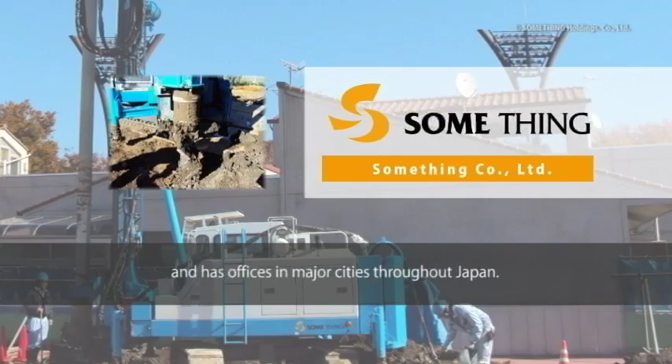Something Co. Ltd. is positioned as the core company of this group and has offices in major cities throughout Japan. The business of Something Co. Ltd. is principally ground improvement work that focuses on residential buildings and small stores. We carry out ground surveys and measurements, ground improvements, and also subsidence correction work in houses where irregular subsidence has occurred.

GIR Co. Ltd. has partnered with a damage insurance company and primarily conducts ground guarantee operations for residential housing. The firm offers SmileGuard, a safety escrow system for house completion, which provides support to the land, a ground guarantee system, and to the completion of the housing.

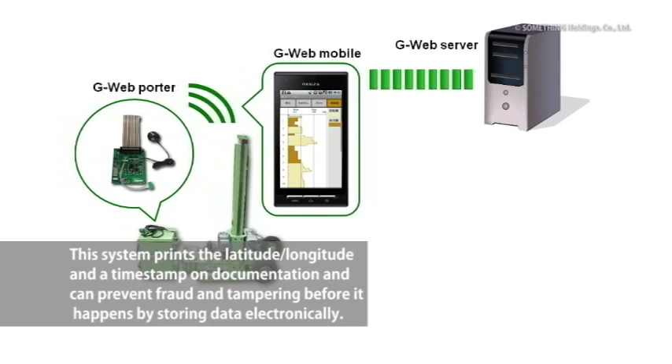GeoSign Co. Ltd. offers the G-Web system, which is a residential ground third-party certification system for the implementation of ground surveys with electronic authentication. This system prints the latitude, longitude, and a timestamp on documentation and can prevent fraud and tampering before it happens by storing data electronically.

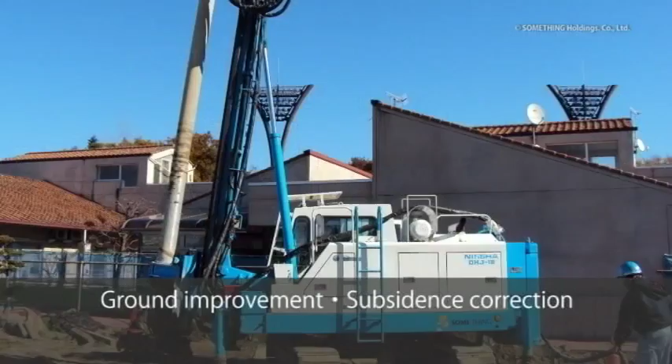Something conducts ground improvement business as a ground specialist. Ground surveys, site surveys, ground improvement, subsidence correction, and ground guarantees. We offer a one-stop service.

Surveys. When constructing a building, if the ground that forms its base is not stable, it is not possible to construct a strong building where people can live with peace of mind. It is possible to provide this stability by improving the ground.

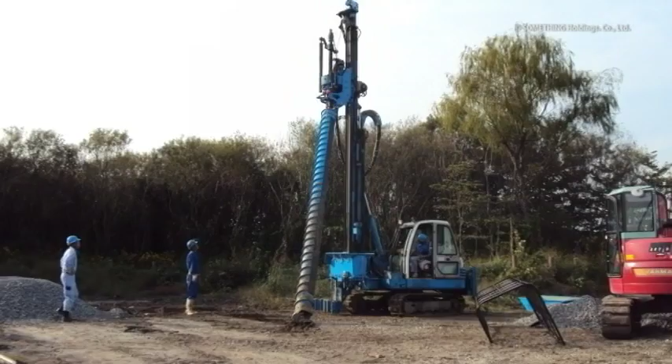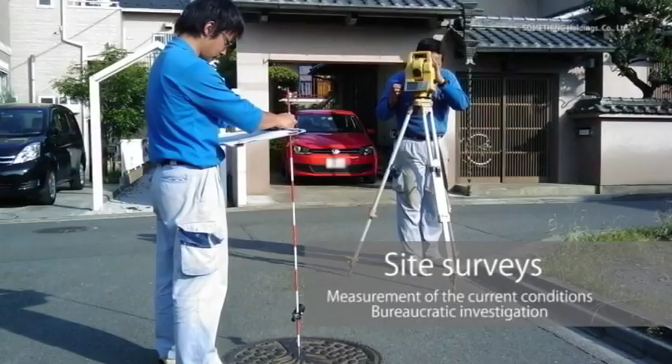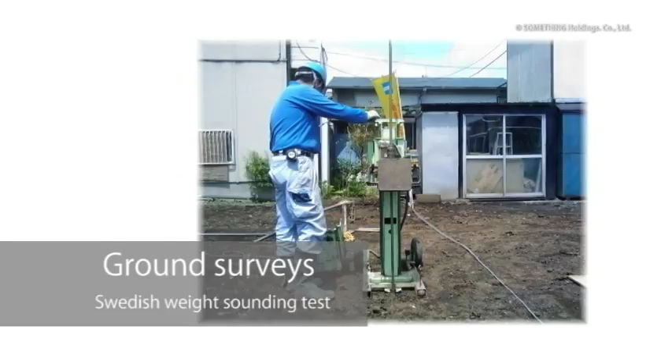Upon carrying out ground improvement, the information from the ground survey and site surveys is used to make the best foundation. The site survey has a measurement of the current conditions and a bureaucratic investigation. Drawings of the site are made, and there is an investigation into the various required regulations and costs in the construction plan. In ground surveys, there are a Swedish weight sounding test, standard penetration test, and plate bearing test.

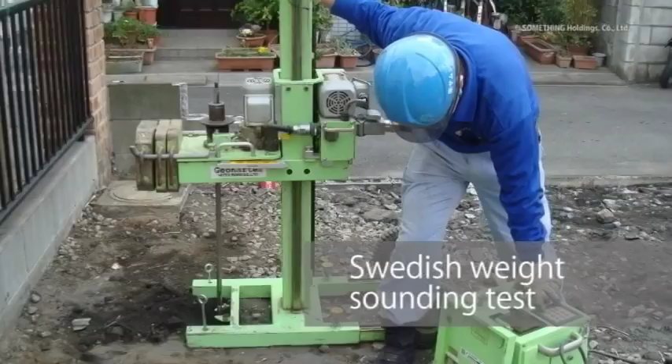The Swedish weight sounding test is the most common technique to determine the strengths of the ground if looking at detached residential housing.

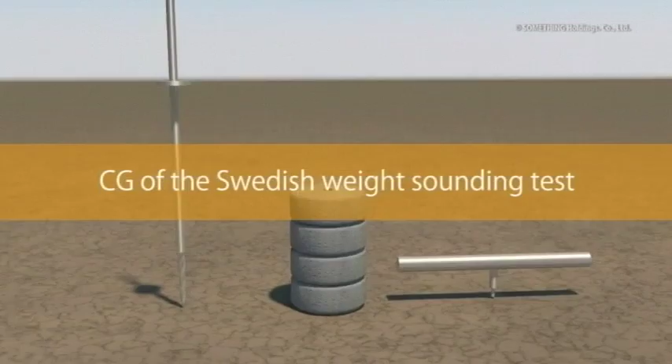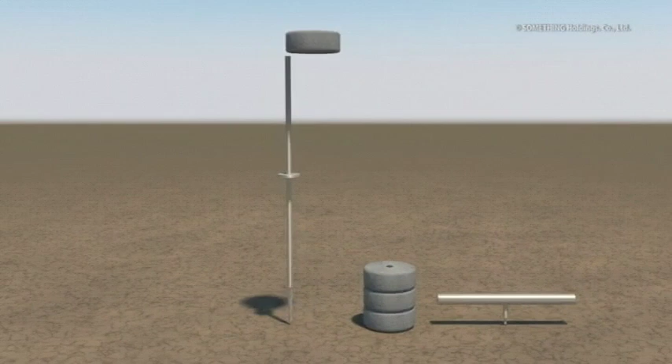A 5-kilogram weight is placed on a rod with a screw point, and there is a check to see if the rod sinks into the ground. In the event the rod doesn't sink into the ground, the weight placed on the rod is increased in turn to 15 kilogram, 25 kilogram, 50 kilogram, 75 kilogram, and then 100 kilogram. If the rod sinks into the ground before the 100 kilogram weight is used, then that weight and the distance of the penetration are recorded.

If there is no penetration, even when a 100 kg weight is used, the rod is rotated clockwise and the required number of half revolutions to penetrate 25 cm is measured. During the measurement, the sensation transmitted from the rod is also recorded.

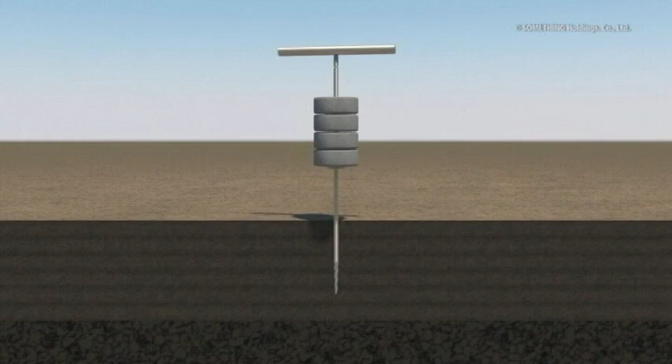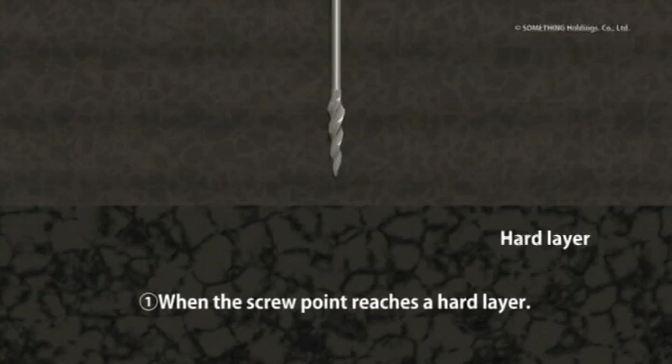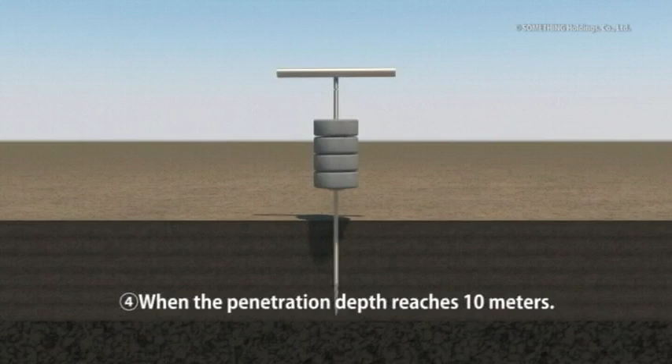When the survey reaches any of the following 4 points, the measurement is complete. 1. When the screw point reaches a hard layer. 2. When the repellent force of the rod during rotation becomes significantly large. 3. When a large stone or similar is hit and it is not possible to move forward. 4. When the penetration depth reaches 10 meters.

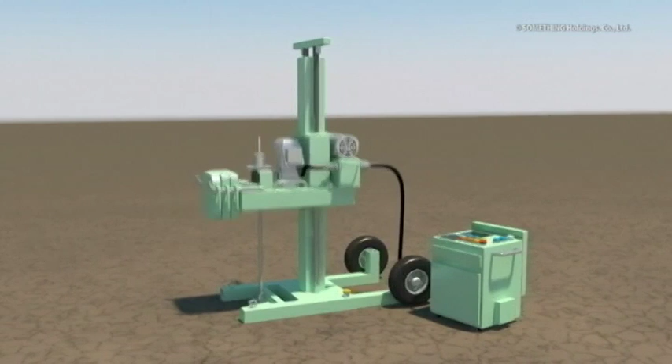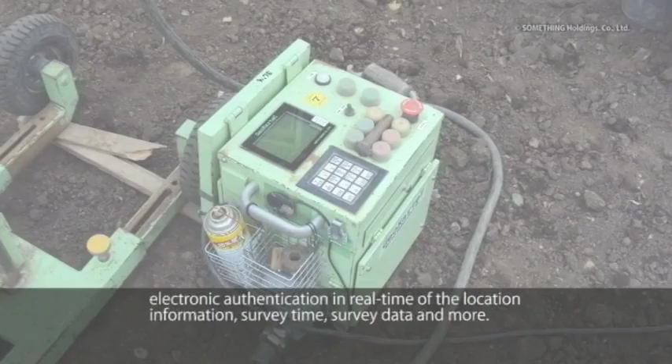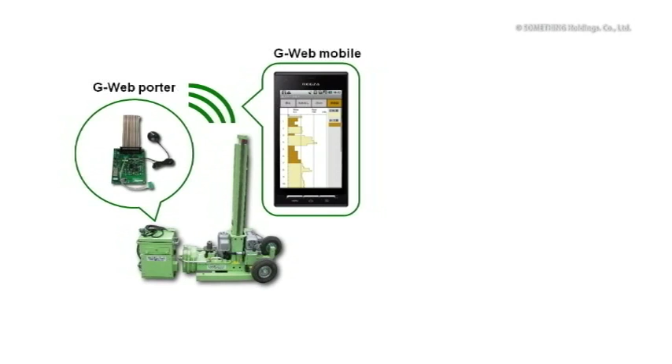If this survey is carried out by hand, it is extremely heavy labor, and so there may be variations depending on the person performing this test. At Something, we perform this test with a fully automatic machine, so it is possible to carry out the survey smoothly and accurately. Furthermore, we have introduced a dedicated system that can carry out electronic authentication in real time of the location information, survey time, survey data, and more. This means that there are safeguards against unauthorized entry and tampering, and it is possible to view the results of the survey immediately. We conduct ground surveys that are both accurate and safe.

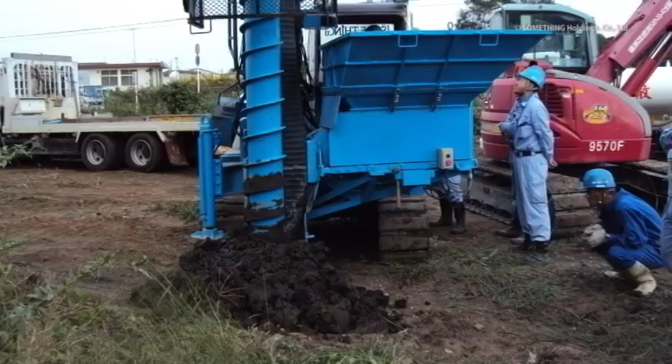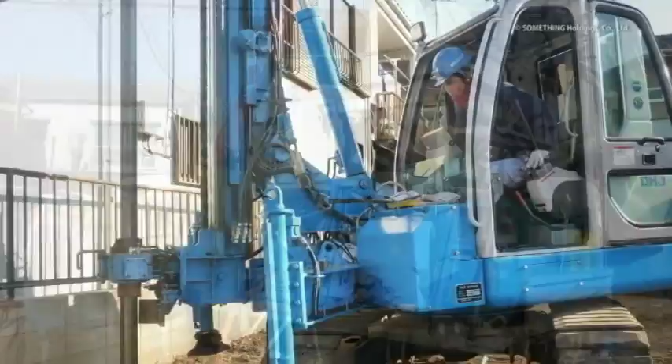Next, we will take a look at some ground improvement techniques. In the event that the ground on which a building is being constructed is not stable, then it is possible to make it stable by improving the ground. At Something, we have at our disposal a variety of techniques for ground improvement and ground subsidence correction work, including techniques that have been evaluated by third-party organizations.

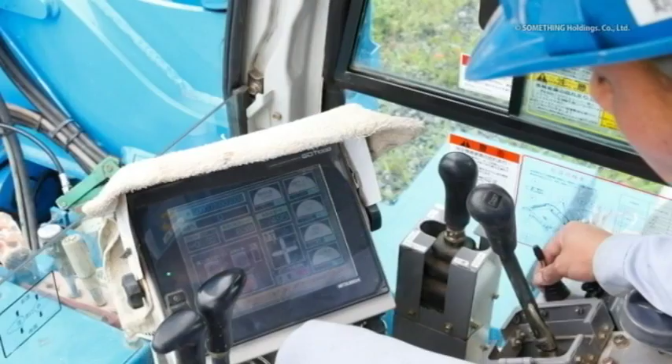We offer techniques that are both optimal and economical. Furthermore, in Something, there is a management by a construction control system that looks at whether the ground improvement work is being suitably carried out, and a visualization of the ground is performed. Typical techniques: the column improvement technique, the surface ground improvement technique, and the steel pipe jacking technique.

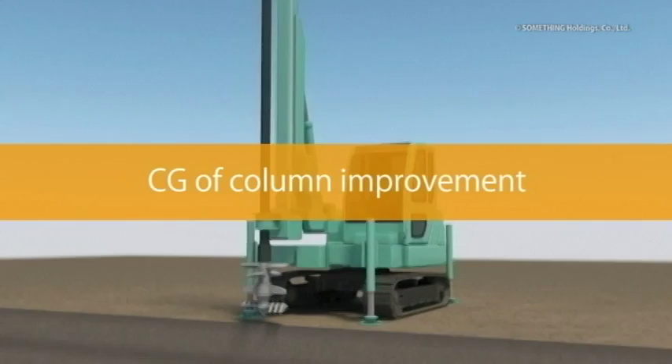The construction machine is set, equipped as standard with construction management equipment for the planned position. While pouring in a cement solidifying agent and water, the machine digs through until it reaches the planned depth.

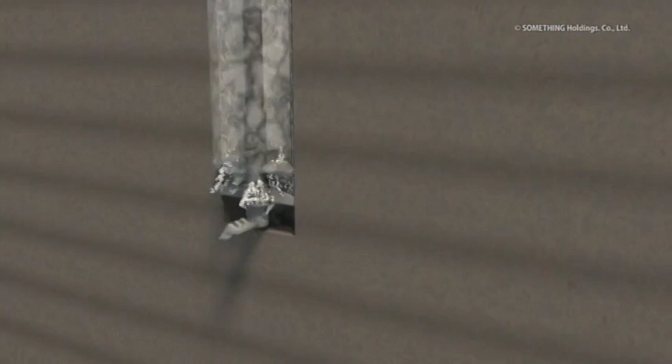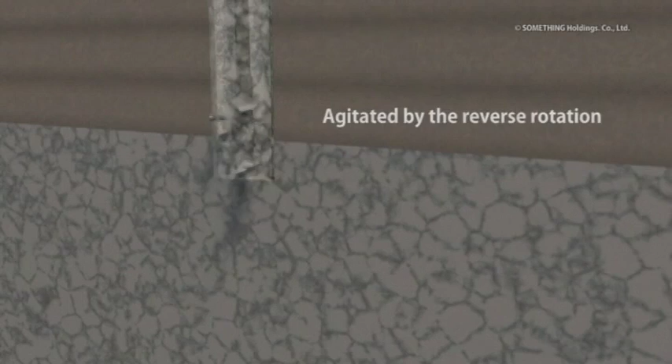After reaching the bottom, the bit of the construction machine returns, while the original ground and solidifying agent are agitated by the reverse rotation. Once again, while agitating to the planned depth, the bit of the construction machine is lowered, and then also returns to its original position.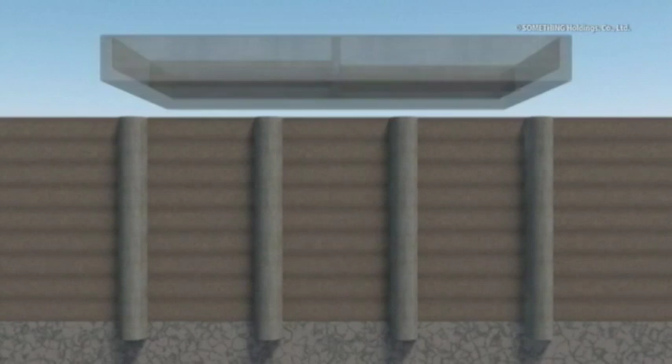The work is not finished until the ground is sufficiently agitated and then completely hardens. After completion, the ground of the building is improved and will become stable.

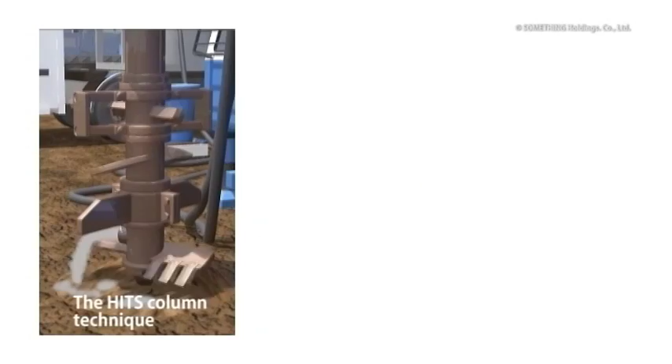Furthermore, at Something, we have at our disposal 3 techniques that have been evaluated and certified by a third-party assessment organization: the HITS column technique, Prop Type S, and the NSB column technique, which was developed by our firm. We can offer you the most appropriate technique to suit your situation, for example, the condition of your ground.

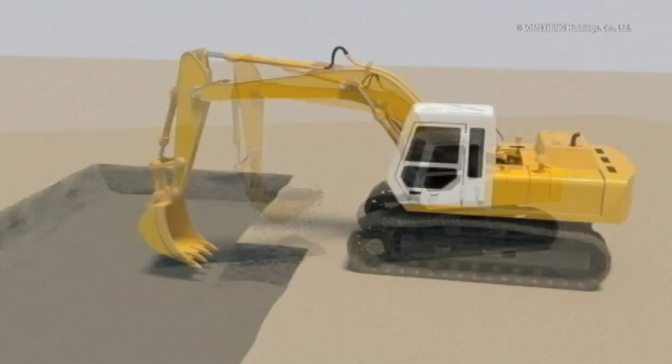The part of the ground that will become the foundation is excavated, and the bottom is made uniform. The cement solidifying agent is poured in according to the mixture amount, and the ground is made even.

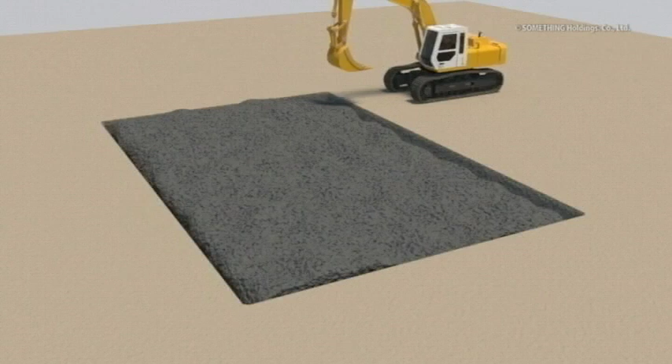The solidifying agent is mixed evenly. After compaction with heavy machinery, a roller is used to harden evenly. After completion, the ground is improved and supports the building.

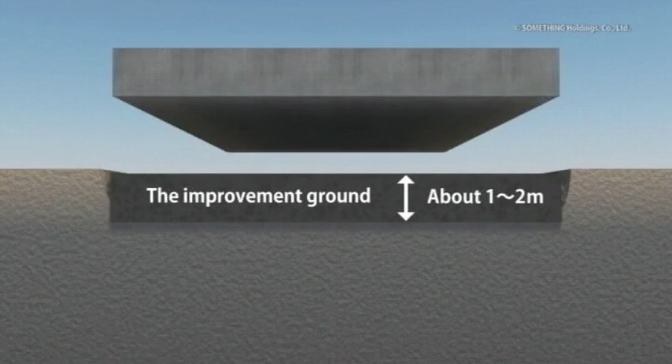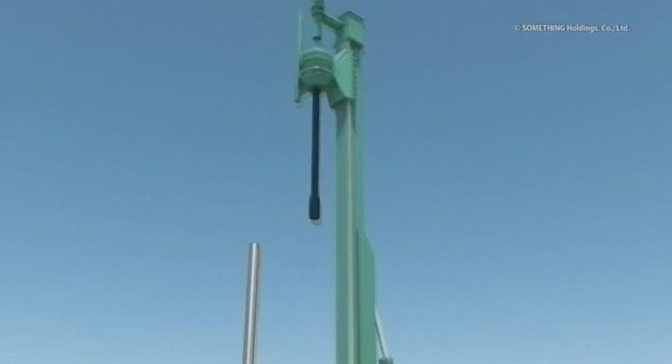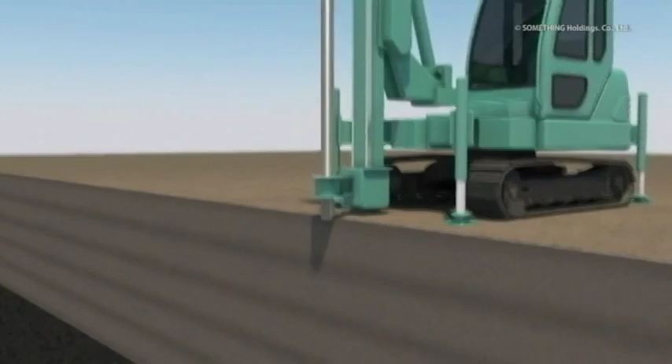This technique measures the increase in the bearing capacity of the ground and the decrease of subsidence through a pipe that penetrates into the soft ground, and the combined action of the friction force of the surface of the pipe and the bearing capacity of the tip of the pipe with the bearing capacity of the ground.

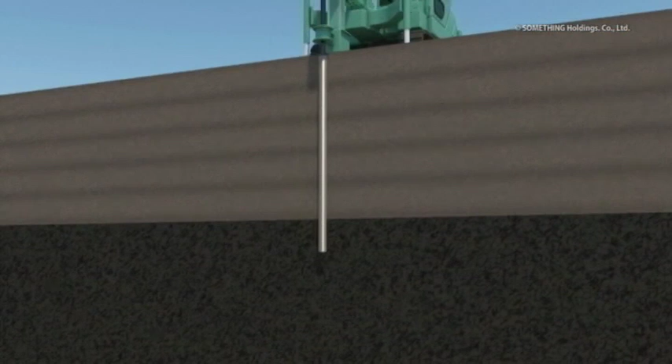The rod of the penetration equipment is set in the head of the pipe, and the pipe is then driven in. While keeping the pipe vertical, it penetrates into the ground by the press-in force and rotational force of the penetration equipment. After installing the cap on the pipe, the foundation is fortified and the ground is reinforced.

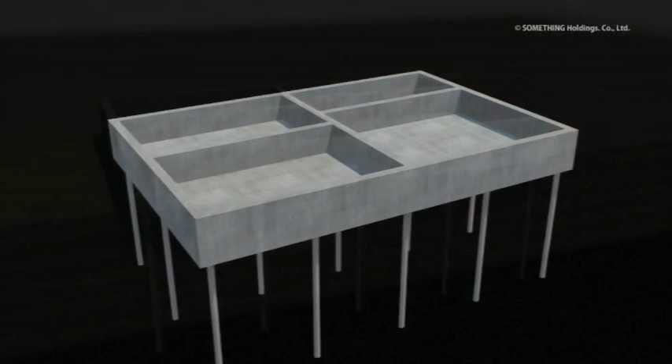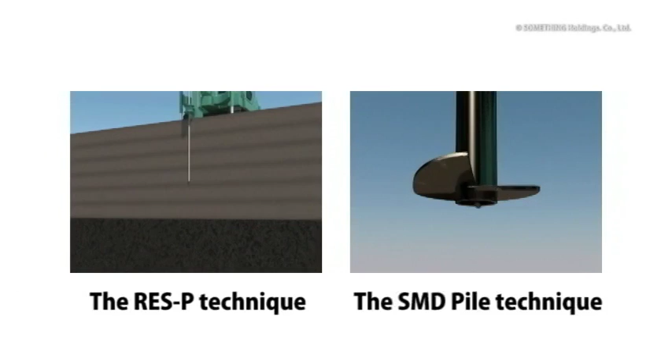At Something, we offer the optimal technique to suit the ground conditions: the RES-P technique, which has no spheroid wing in the tip, or the SMD pile technique, which has a spheroid wing in the tip. These techniques have been evaluated and certified by a third-party assessment organization.

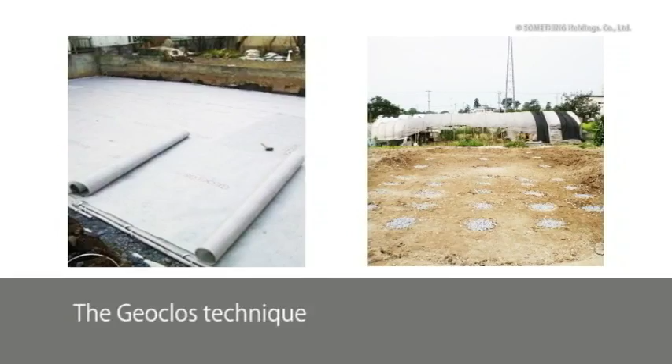In addition to the techniques that we have shown you at this time, we offer the Geoclos technique and the EcoGeo technique that have been developed by our firm, among others. These have been evaluated and certified by a third-party assessment organization. In each individual case, we select the most appropriate technique and propose an economical approach that takes into account the environment.

Subsidence correction.

Subsidence correction is work that corrects buildings back to a state of normalcy when they have started to incline due to changes in the land and the lack of bearing capacity in the ground. It is possible to select from various techniques for subsidence correction depending on the state of the building and ground. The time required and budget varies depending on the technique in accordance with these conditions.

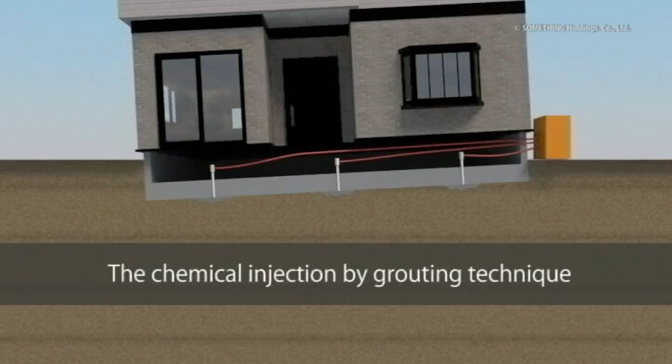We will now look at the features of 5 techniques for this: the underpinning steel pipe pile press fit technique, the underpinning pressure impression technique, the chemical injection by grouting technique, the chemical injection by urethane resin technique, and the base raising technique.

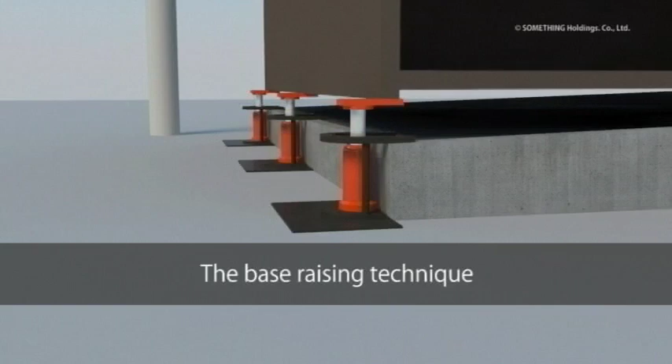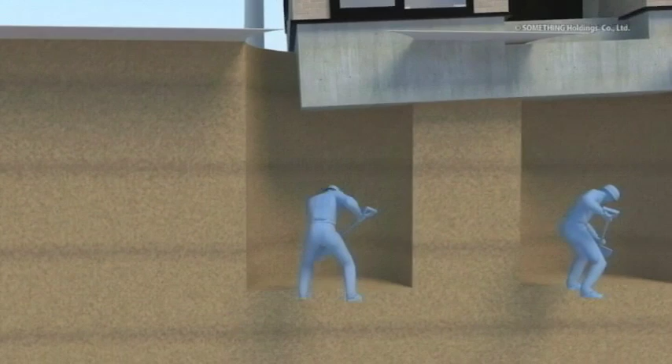The ground below the foundation is dug out, a tunnel is excavated, and workers pass under. The underpinning steel pipe pile press fit technique uses a hydraulic jack and press fits a steel pipe to firm ground inside the tunnel and raises the building through this counterforce.

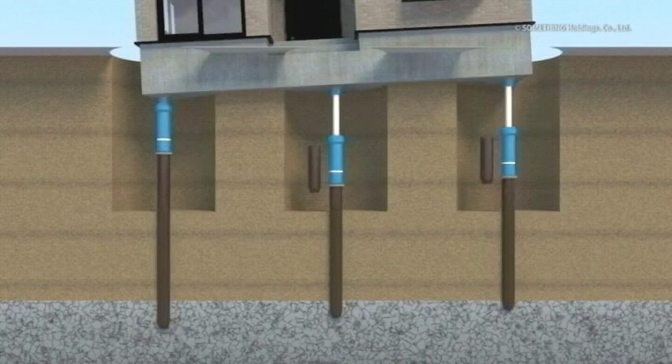This process is performed in multiple locations until the building becomes level.

Features: 1. There is no need to live in a temporary residence during construction. 2. This technique can be applied to both mat foundations and continuous footing. 3. The risk of repeat subsidence is reduced because this technique uses the counterforce of the hard ground.

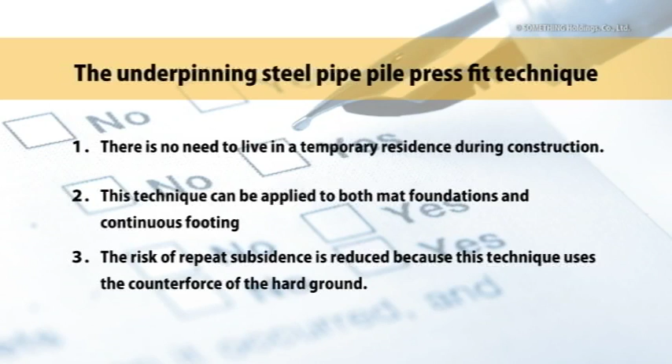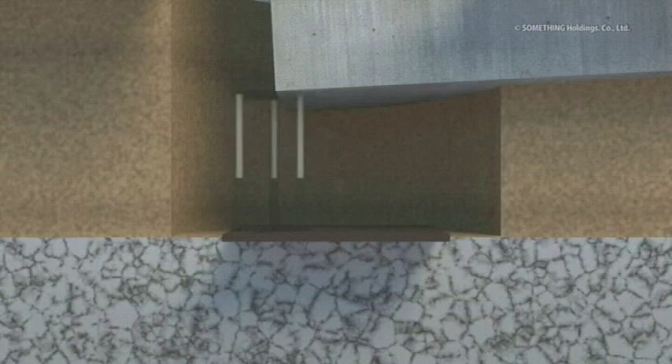The ground below the foundation is dug out, a tunnel is excavated, and workers pass under. The underpinning pressure impression technique spreads the pressure impression inside the tunnel and installs a hydraulic jack. The building is raised through this counterforce.

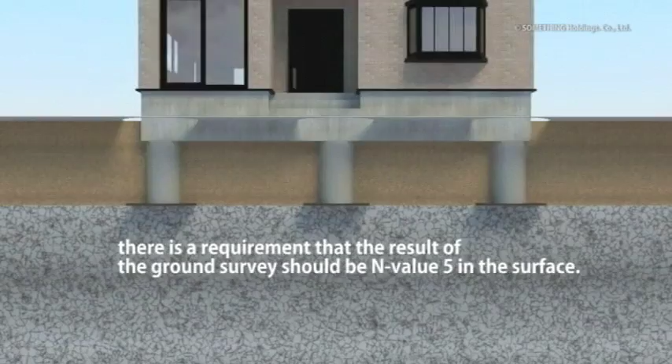However, there is a requirement that the result of the ground survey should be N value 5 in the surface. This process is performed in multiple locations until the building becomes level.

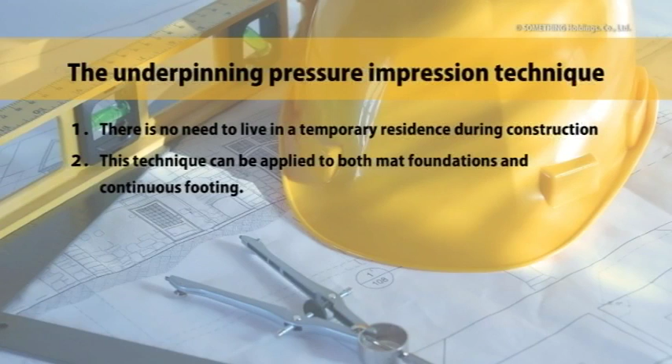Features: 1. There is no need to live in a temporary residence during construction. 2. This technique can be applied to both mat foundations and continuous footing. 3. The risk of repeat subsidence is reduced because this technique uses the counterforce of the hard ground. 4. The time required is shorter and the costs are cheaper compared to the steel pipe pile press fit technique.

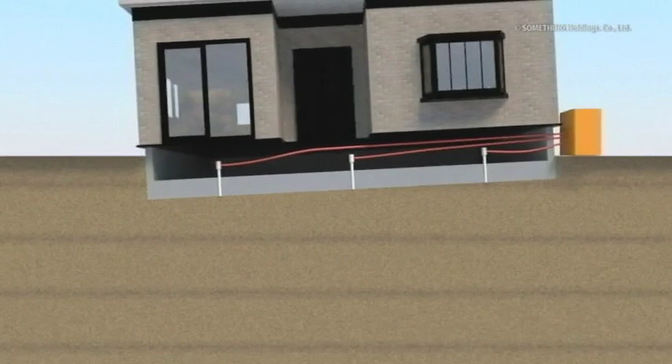This is a technique that injects chemicals by grouting in the lower part of the foundation and then raises that foundation. Multiple inject pipes are installed in the ground of the lower part of the foundation, and with a special injection through the multi-point interval method, permanent grout is injected in, and the foundation along with the building are raised.

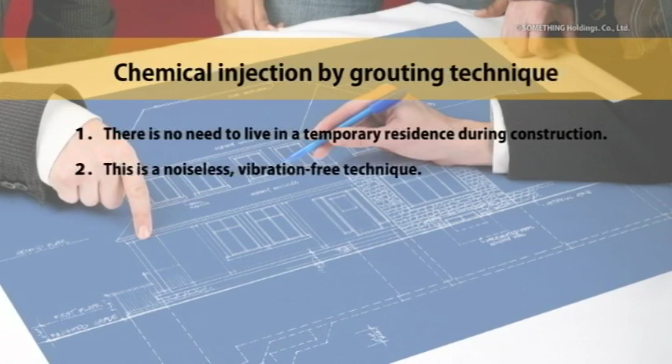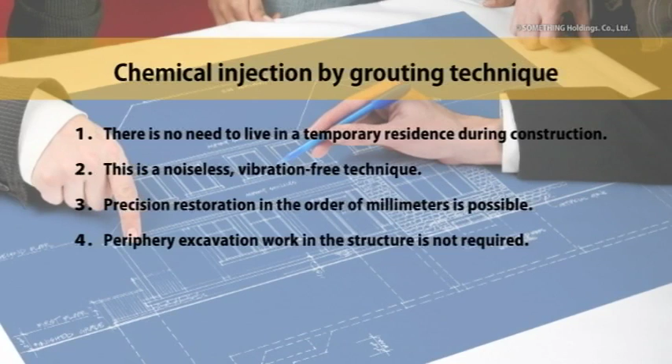Features: 1. There is no need to live in a temporary residence during construction. 2. This is a noiseless, vibration-free technique. 3. Precision restoration in the order of millimeters is possible. 4. Periphery excavation work in the structure is not required. 5. A mat foundation is a condition of construction. 6. Corrections above a subsidence amount of 5 cm are possible.

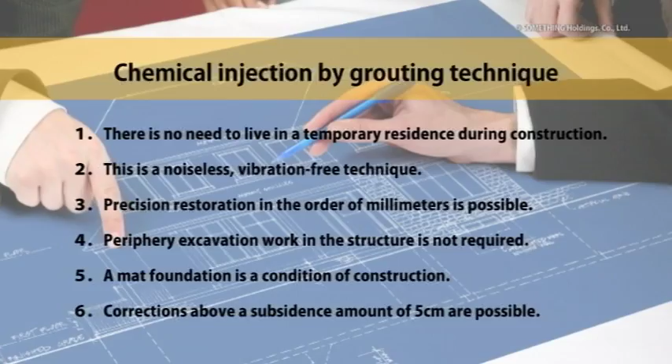In the chemical injection by urethane resin technique in the lower part of the foundation, urethane resin is injected into the lower part of the foundation. This foaming pressure forces up the housing where each foundation has subsided and returns it to its original position. However, a mat foundation is a condition of construction.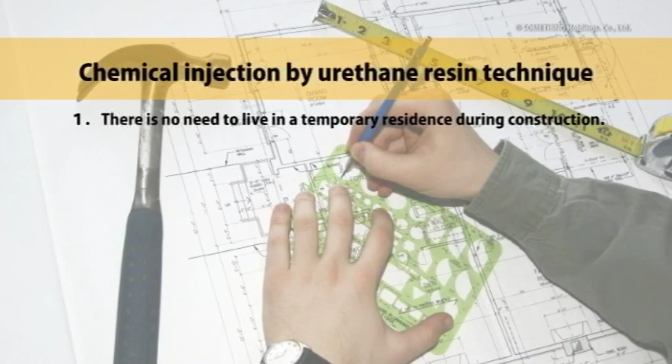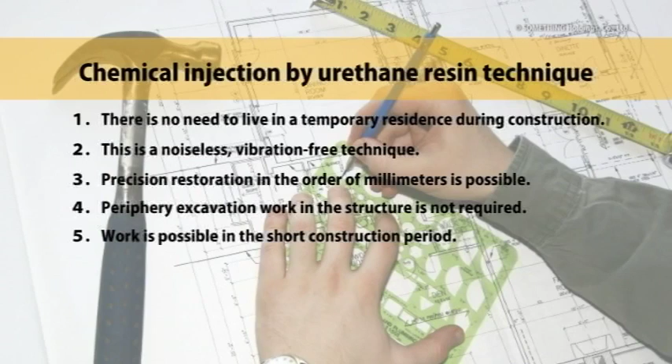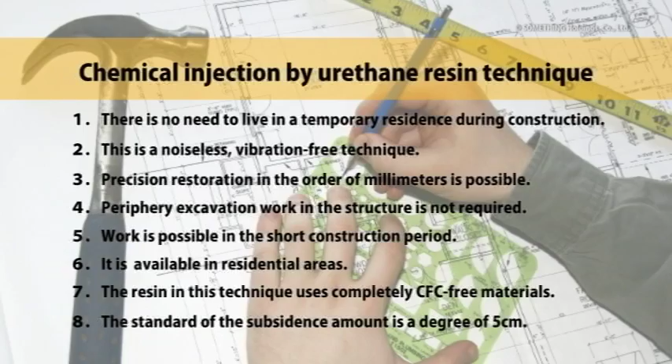Features: 1. There is no need to live in a temporary residence during construction. 2. This is a noiseless, vibration-free technique. 3. Precision restoration in the order of millimeters is possible. 4. Periphery excavation work in the structure is not required. 5. Work is possible in a short construction period. 6. The set of materials and equipment are loaded onto a small truck, and it is also available in residential areas. 7. The resin in this technique uses completely CFC-free materials made in Japan, which take into account the environment. 8. The standard of the subsidence amount is a degree of 5 cm.

It is possible to apply the land, which is a ground guarantee system provided by GIR Co. Ltd.

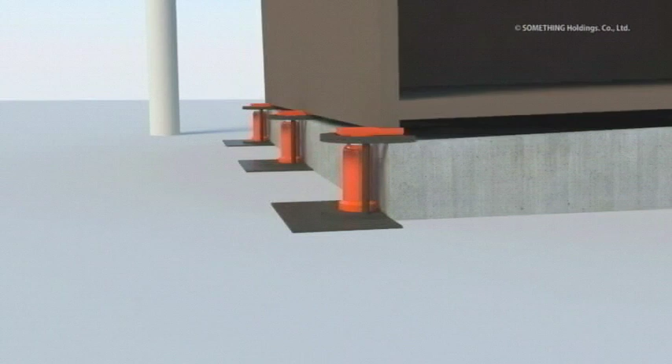This is a technique that temporarily severs the edges of the building and the foundation, jacks up only the building, and restores its level. However, there is no reinforcement effect in the ground, so there is the condition that it will not sink any further.

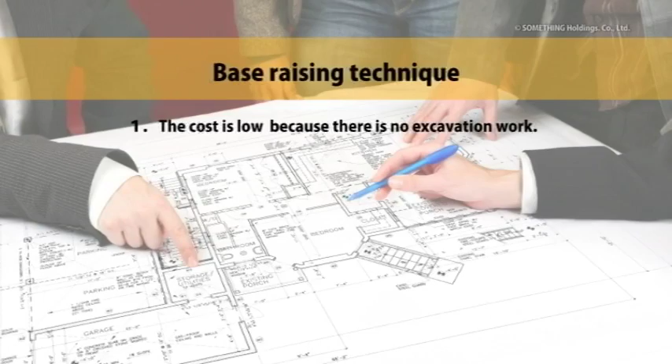Features: 1. The cost is low compared to other techniques because there is no excavation work. 2. There is no need to live in a temporary residence. 3. This technique is suitable for partial corrections. 4. This technique can be applied to both mat foundations and continuous footing.

In each individual case, we select the most appropriate technique from those listed above, according to the state of the damage to the land and your budget. We will propose an economical technique that takes into account the environment.

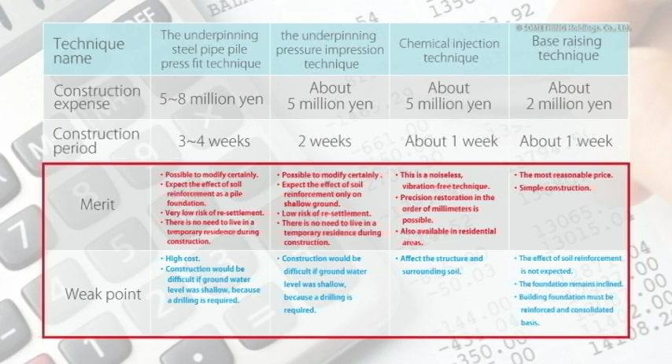Something Co. Ltd. has set up offices throughout Japan, and in each plot of land, we work closely locally. We are engaged in research and development that will lead to improved reliability, productivity, and quality in the ground industry in order to be able to propose quickly and carefully high-quality services to our customers.

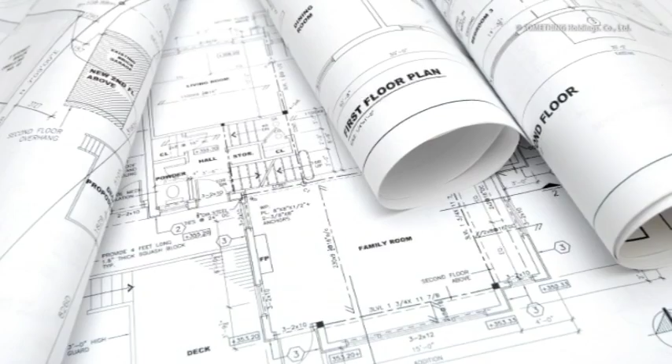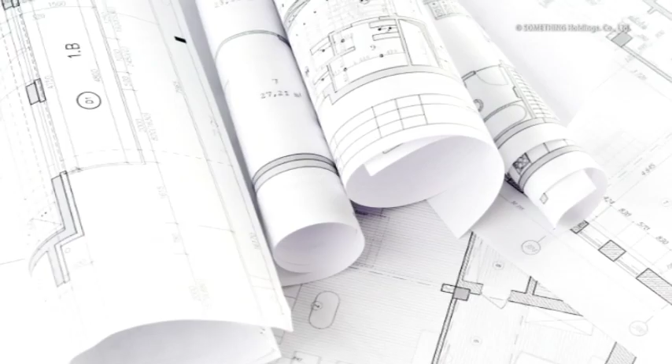GeoWeb Report, a survey results viewing service on the web developed by GeoSign Co. Ltd. and our group of companies, is a new online service that allows you to view the results of surveys on the internet in real time. If you are somewhere connected to the internet, it is possible to use this system anywhere at any time. It is also possible to instantly search data from previous jobs, saving you time looking for the right document. In addition, it has become possible to search for investigation reports on a map.

Next, we will look at the ground guarantee system. Homeowners' warranty insurance is exempt from responsibility for problems caused by land subsidence. In other words, if by any chance irregular subsidence occurs in a residential house, it may incur a large sum of money to fix the problem.

At Something Group, we offer ground insurance that will give you peace of mind. The land is provided by GIR Co. Ltd. and takes on the responsibility of the ground guarantee business in the Something Group. The land is a comprehensive ground guarantee service that offers peace of mind.

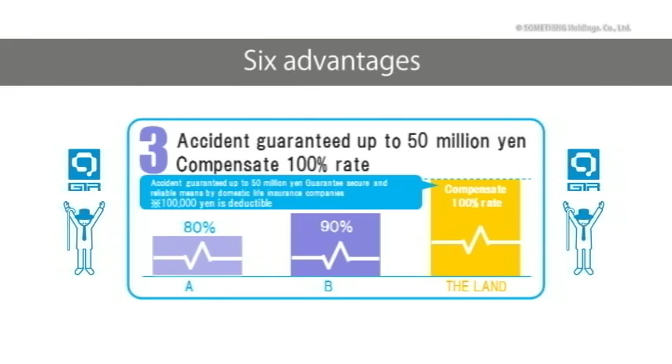By entering into an insurance agreement with a damage insurance company, it guarantees the surveyed and improved land over a long period of time. In the unlikely event that a problem should develop whose cause lies in the ground, this peace of mind warranty service promises to restore the ground and building to their original state by taking on the responsibility of a guarantee organization.

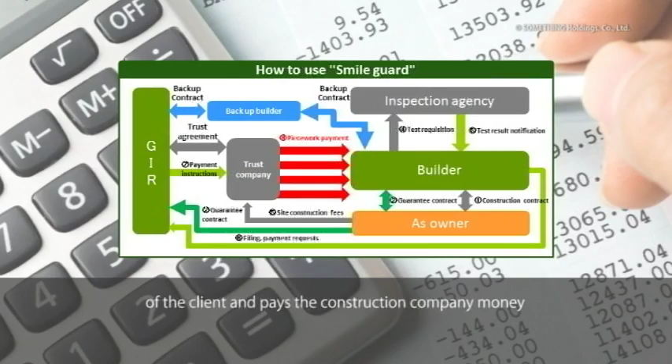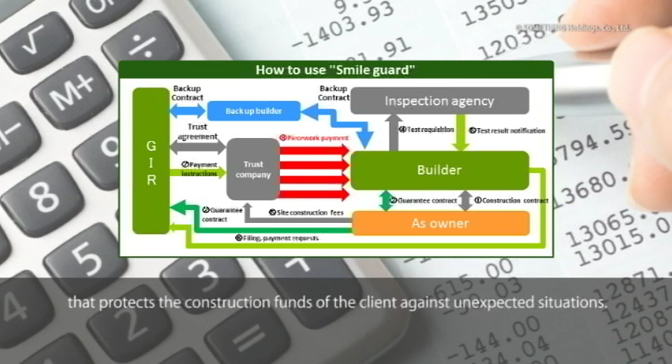SmileGuard acts as an additional guarantee service and is a safety escrow system that is managed through an account in trust established in advance for the construction funds of the client, paying the construction company money according to the volume of construction work. It is an independently developed escrow system for house completion that protects the construction funds of the client against unexpected situations.

Something Group is committed to further growth in the future, and we are continuing to evolve and develop as a residential value creation business group that is constantly creating new services.